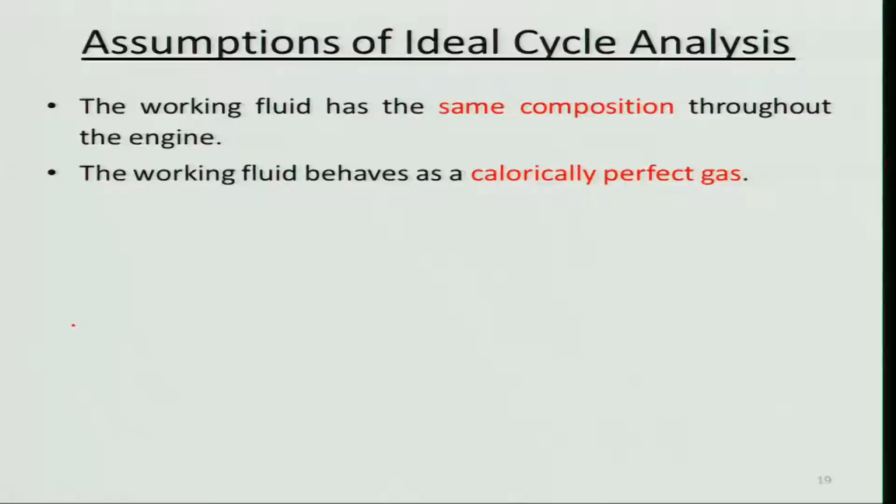And fuel flow rate is negligibly small in comparison to air flow rate, because if you look at the ratio of air to fuel flow rate, it's around 30. Of course, it can vary from 20 to 40 or even more, but we are neglecting it whenever we are comparing. In other places, we won't be neglecting it.

For example, if I am talking about TSFC, thrust specific fuel consumption, or thermal efficiency, can I neglect and say m dot F will be 0? I cannot manage to do that. So that way you should understand: comparison, whenever we are comparing, we'll have to neglect.

And isentropic compression in air intake, fan and compressor. So compression process occurs in all these three components. We are saying isentropic, but in real situation it won't be. Isentropic means reversible and adiabatic. How is that possible? It is not possible.

Of course, one can say that the fluid is flowing through the compressor and air intake very fast, so maybe heat loss to the ambient will be very low. You can neglect it, but it cannot be reversible. Friction will be there; without that, you cannot really do much, particularly in compression. So therefore you cannot have that, but we are doing it for simplicity.

And isentropic expansion in turbine and nozzle. And we are assuming constant pressure combustion, because this is deflagration, and unlike a combustion chamber or closed volume where combustion is taking place, here the pressure remains constant.

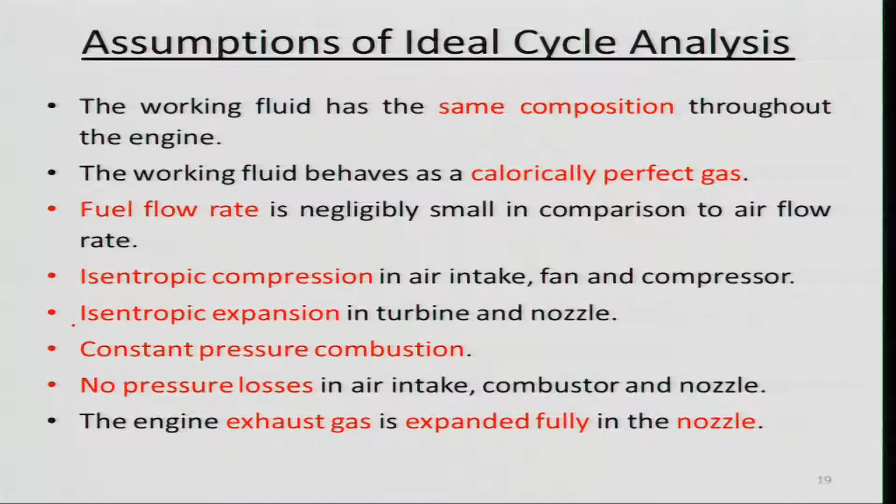But engine exhaust is expanded fully in the nozzle, that means the thrust is contributed due to the momentum, and this is of course an ideal situation, because particularly in a rocket engine and other things which we are not considering, but there you cannot have that.

Here, in some regimes it will be expanded fully, in other regimes it won't. With this assumption, we will now move into the ramjet engine. Keep in mind these assumptions will be valid for the ramjet, and then the turbofan, turbojet, and turboprop engines, which we will discuss under ideal cycle. What we are doing is basically parametric cycle analysis, meaning we will vary those parameters and see how it affects the various performance parameters. That is the objective of this cycle analysis, unlike other analyses you have done—it can be used as a design tool.

So let us look at the ramjet engine. I have shown a schematic diagram. This portion is the air intake. In this case, the air will be entering at supersonic speed, because the ramjet engine operates under supersonic speed conditions, and it will be entering and then decelerated. That means compression of air will take place, and then it will be burned in the combustor. Of course, a flame holder will be there, and once this high temperature, high pressure gas is produced, it will be expanded in a nozzle, which is a convergent-divergent nozzle.

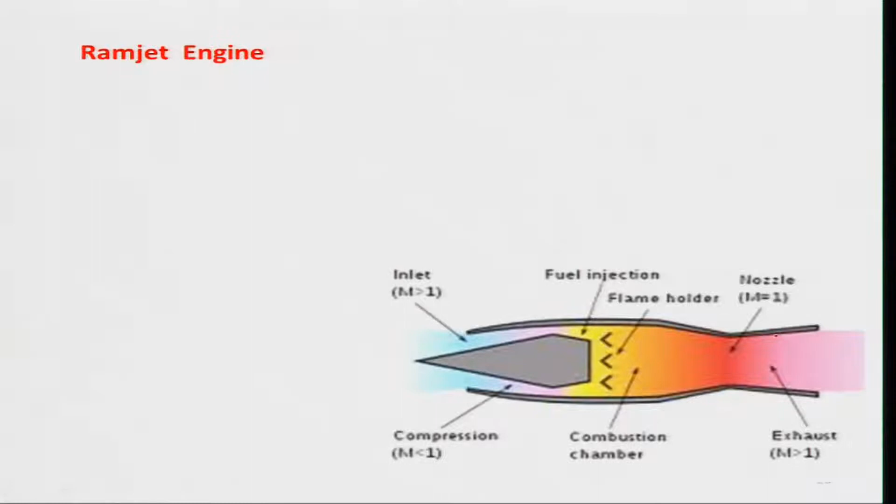Let us look at an actual cutaway view of a ramjet engine. Why is it called ramjet? Because in this case the ram pressure is being utilized. For example, when the air is coming at supersonic speed, there will be a supersonic spike which acts as a diffuser—this is known as supersonic compression. The air will be decelerated from supersonic speed to sonic in the supersonic intake, and then from sonic to subsonic.

Besides this, you need fuel, because fuel has to be burned. For that you need a pump, and an inlet will be there—injectors or atomizers, and a fuel manifold. Fuel is generally stored, like in a Boeing aircraft, in the wing. So in the fuel injection system, atomizers will be there, and it will be mixed with the incoming air, and the mixing should be good.

When you burn it, the flame has to be stabilized with the help of flame holders—a very simple stabilization mechanism is used. When this hot gas is produced at high pressure, it is expanded in the nozzle. If you look at this, it's convergent-divergent, though very small in this case. But what about this other part? There the mixing and combustion take place, and it should be uniform so combustion is complete, because it's at a slightly higher speed. Keep in mind that subsonic combustion occurs here, not supersonic combustion.

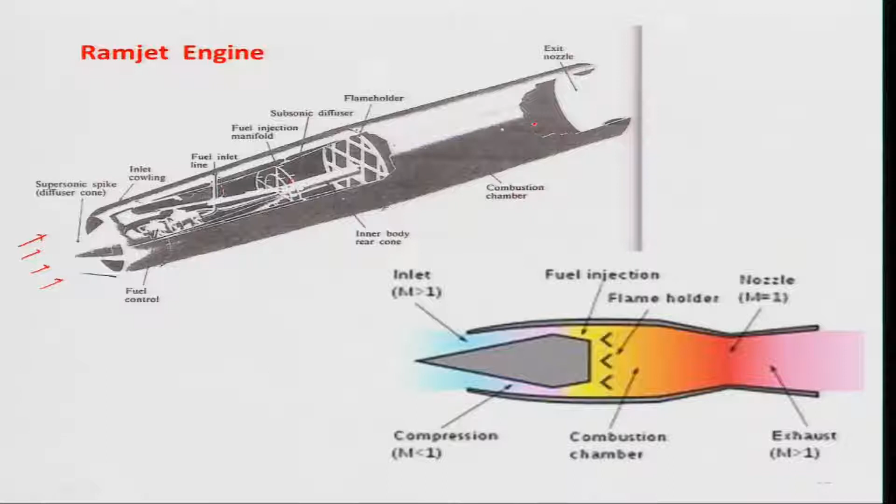So now if you look at it, it's quite a simpler system compared to the gas turbine engine. Why? Because it doesn't have compressor. If compressor is not there, that means there's no turbine. So there's no shaft as such, and the complexity is very, very simple.

Let us look at a schematic of a ramjet which we will be using. Keep in mind that 0 is the station number, and 0 to 1 is supersonic compression—the air has to decelerate from supersonic speed to sonic condition. Then 1 to 2 is subsonic compression. Generally, people design to achieve a Mach number of 0.3 at station 2, at the exit of the air intake. The total 0 to 2 is your air intake, combining both supersonic and subsonic compression. There is no compressor between station 2 and 3, although we keep the same station numbering.

Station 2 and 3 are almost the same, we can say, although it's not shown in this figure. Then 3 to 4 is combustion, where fuel is sprayed, mixed, and stabilized with the help of flame holders—basically gutters used as flame stabilizers—and then expanded in the nozzle, that is 4 to 9. So why don't we need compression here? Because the air enters at very high speed, for example around Mach 2.5 or greater. We compress it by decelerating the flow at the end of the air intake down to Mach 0.3.

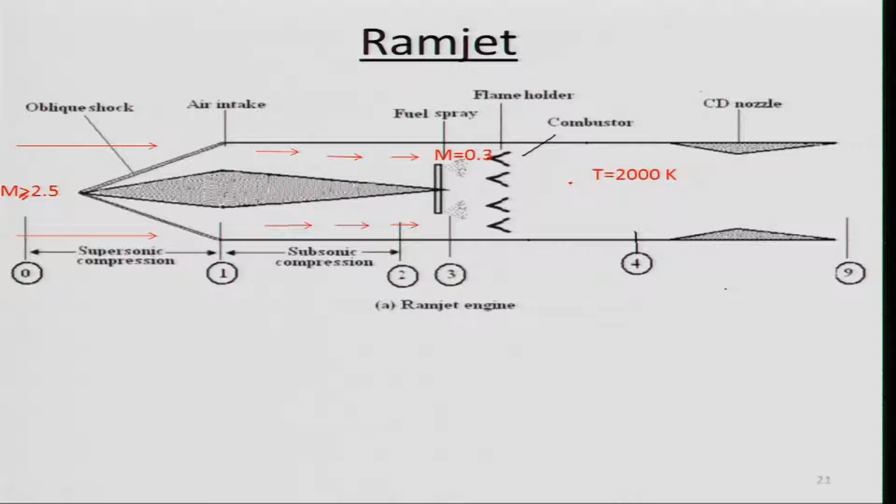There is another important aspect, that you can add more amount of fuel such that it can go to the temperature of 2000 Kelvin, because there is no rotary elements in it. So there is no material problem, although material problem about the combustor liner will be there, but that is being stationary, so you can manage to cool it, design properly, because with the nowadays good exotic materials have come up, you can go a little more beyond the 2000 Kelvin.

Earlier days people were restricting to 1400, 1500 Kelvin kind of thing, even in the ramjet. But when the designer used their mind and came up with ideas how to develop, how to operate the ramjet engine with even existing materials, that is the innovativeness of the design. So therefore, we always work with constraint, and whenever we work with constraint, we get a lot of ideas. So whenever you face a problem, you will have to see that I will have to do something, so that I will use my mind, so that I will get the problem to be solved.

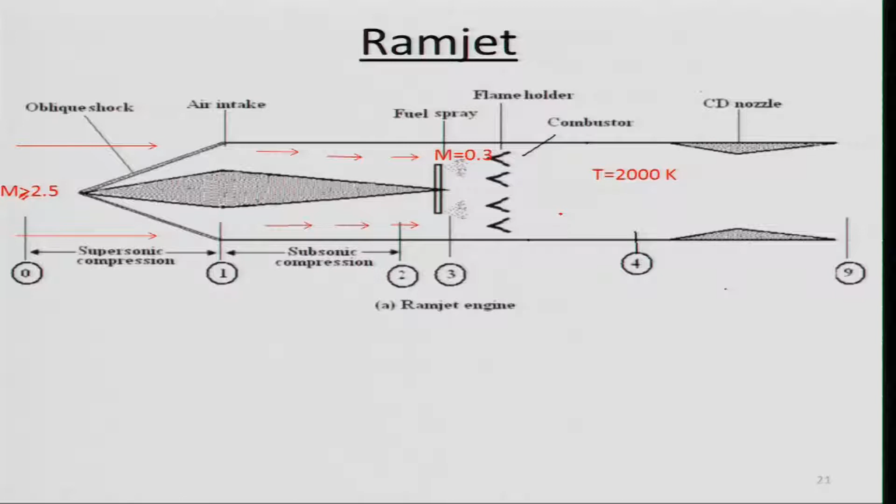That is very important, and it is the simplest of air breathing engines, because it is devoid of gas turbines and rotating elements like turbines and compressors. Of course, as I told, the pressure ratio is limited by the flight Mach number and performance of air intake, that we will see as you go along. It cannot develop the static thrust itself.

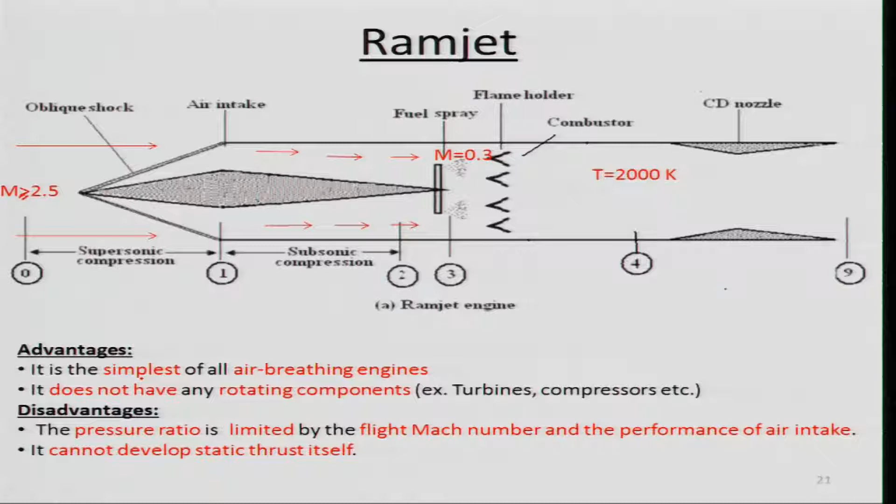But the question is, if it cannot develop static thrust, I cannot really use this unless otherwise I am having another aid to do that. For example, I can carry a missile based on the ramjet principle with a rocket, or in an aircraft, supersonic aircraft, fighter aircraft, then I launch. But if I want to use a ramjet from the ground itself, what do I have to do? What are the ideas? Can anybody tell me?

Pulse jet. Pulse jet itself I can use. Why should I use ramjet? Rocket. Rocket is already being used. So also aircraft. But I want to do something. So what do I have to do?

So what I am thinking, I will leave this question to you, and think about it. If you come up with some ideas without looking at existing ones, then it will be interesting to discuss. Otherwise, some ideas I can give, but I don't want to give at this moment. Later on, we'll see.

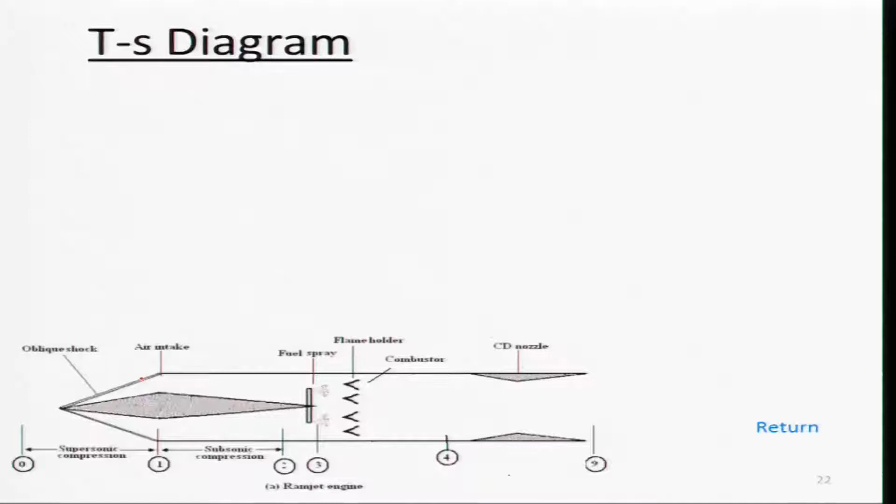Let us look at what are the processes that are involved. As you told, 0 to 2 is basically the compression. In a TS diagram, I can write down 0 to 2, that is the compression, isentropic process, isentropic compression. But if I look at in a PV diagram, how it will be? Compression process 0 to 2, T2, it will be T2, and then TT2 from this station to station 4, it is the combustion, that is constant pressure combustion.

So if I look at in a PV diagram, it will be very simple, that is a constant pressure. Pressure is remaining constant. And PT4 to P9, it will be expansion. Expansion where? Expansion in a nozzle. That is isentropic expansion. So it will be TT4, and this station is basically 9.

And I am just saying it is basically station 4, because we are talking about totally. Keep in mind, whenever I am talking about ratio in combustion chamber, I will be saying pi B will be PT4 by PT2, total I am considering. If I say it is tau B, it will be similar, TT4 by TT2. But whereas when I am coming over here, it is the static condition at the exit of the nozzle.

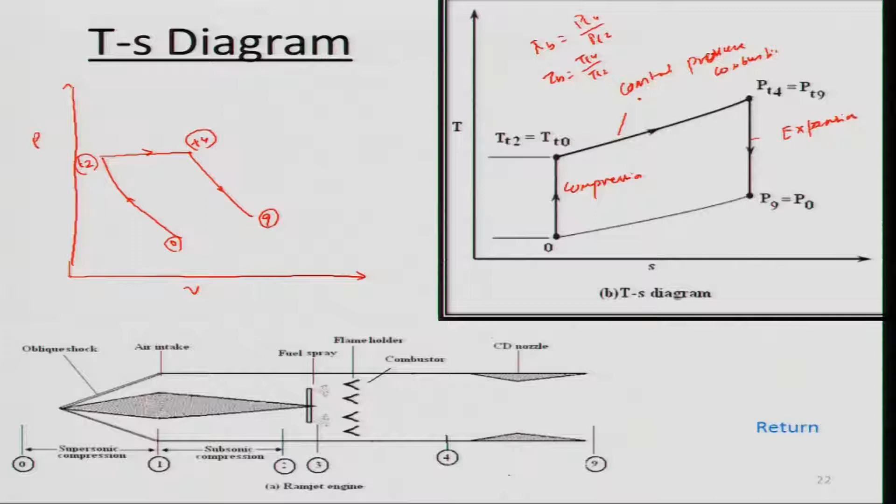Any doubt in this? Because it's a very important thing, and we will be using similar processes describing the process diagram like T-S, P-V, H-S, or some other thing. I can have T-V as well. So you should think about how I can describe the processes in various ways, because that will help you enrich your mind.

So the thrust equation for ramjet engine is basically: thrust equals m dot 9 V9 minus m dot naught V0 plus A9 (P9 minus P0). Keep in mind that in the ideal cycle, we assume a fully expanded nozzle, so therefore P9 is equal to P0. So therefore thrust equals m0 V9 minus m0 V0 only, contributed from the momentum.

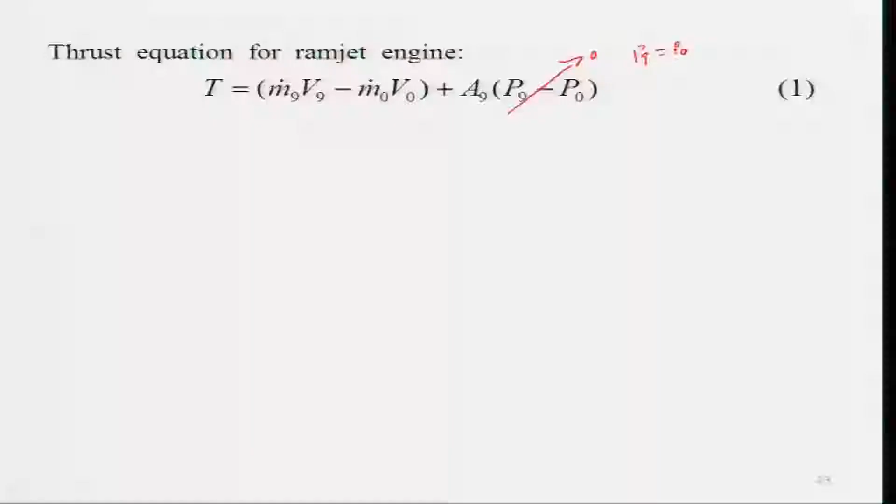What are we trying to do? We are trying to express these equations in terms of various ratios so that we can vary and see what we are doing. Keep in mind this involves a lot of algebra. As I told, it is P9 equals P0, and then m dot 9 is equal to m dot naught, that we are assuming.

That means whatever mass is exiting is equal to the mass entering. That means we are neglecting the mass of fuel being added, which is not exactly right, but we do it for simplicity. What I mean is, m dot 9 is equal to m dot naught plus m dot f. This we are saying is small compared to m0, that's why it is neglected. So it is approximately equal to m0, not exactly true.

So what I'll do is write down this expression. I'll take this m0, V9 and a0, and I am getting V9 by a0. I'll basically find out this a0. This is nothing but m0. And if you look at a0, it is the speed of sound, isn't it? This is the speed of sound.

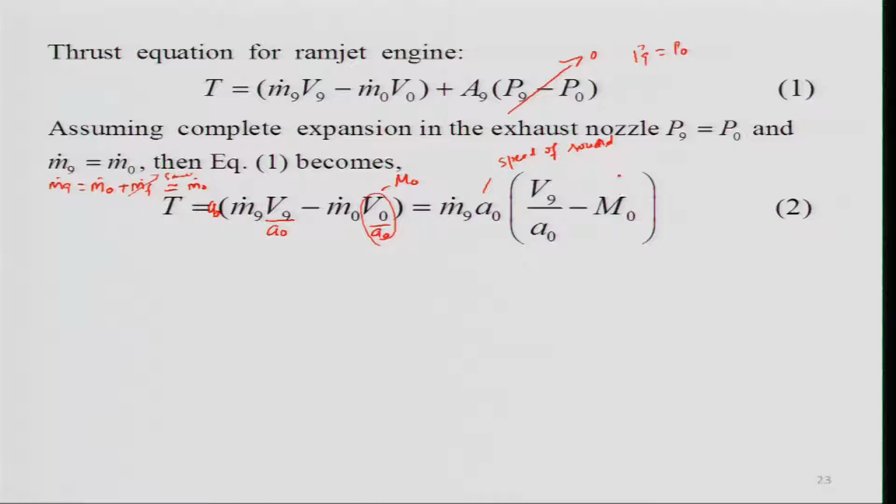Sound where? Ambient, or the free stream. Free stream speed. And m0 is the free stream Mach number.

And this a0 is nothing but root over gamma r t0. In some places you can see this is gamma naught, corresponding to what you will be using not in the ideal cycle but in the real cycle.

So I can write down V9 by a0 whole square is equal to, by definition, a9 square M9 square divided by a0 square, and this a9 square is nothing but gamma 9 R9 T9. We assume gamma 9 equals gamma naught, and R9 is same as R0. So what we get is T9 by T0 times M9 square. So I am getting V9 by a0 whole square equals T9 by T0 times M9 square.

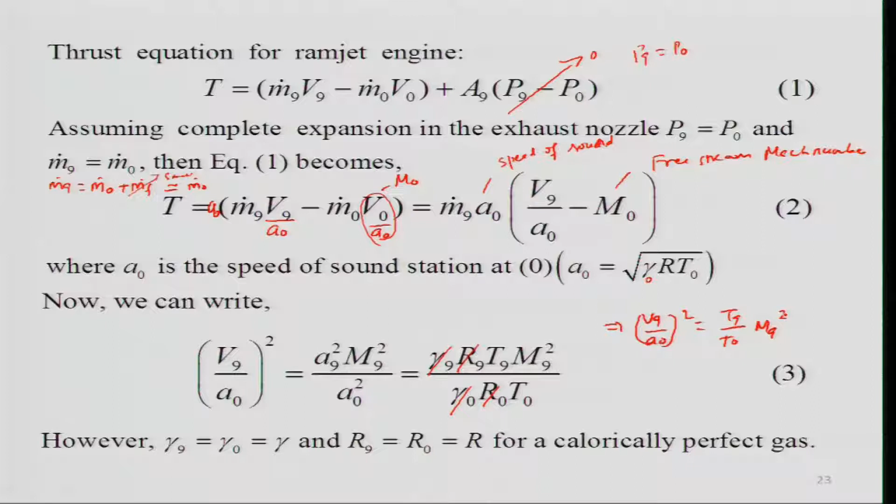I will be writing the same thing in the next slide. Is that clear? So, equation 3 becomes V9 by a0 whole square equals T9 by T0 times M9 square.

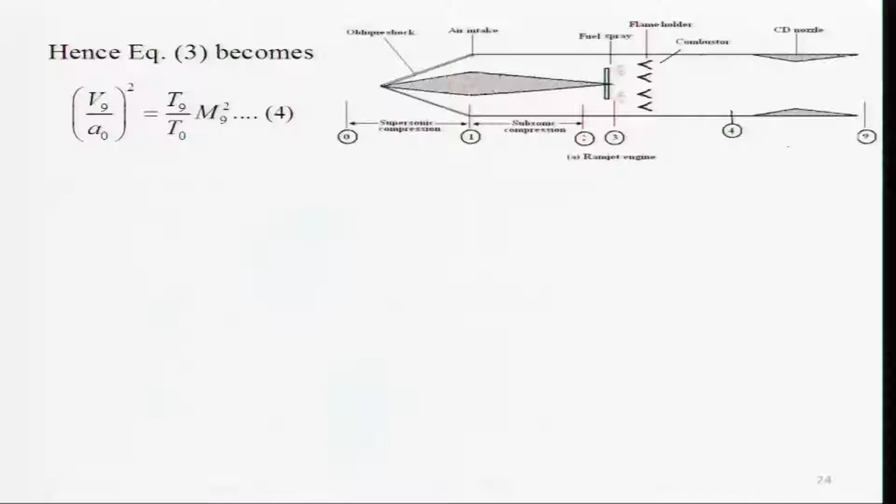So if you look at M9 square, I can express it for an isentropic process, because the expansion is taking place in the nozzle. Can I not write down what M9 will be in terms of pressure ratio, just using the isentropic relationship? So I can write M9 square is nothing but 2 divided by (gamma minus 1), times (Pt9 by P9) to the power of (gamma minus 1) divided by gamma minus 1. This is from the isentropic relationship for Pt9 by P9. I've just rewritten it.

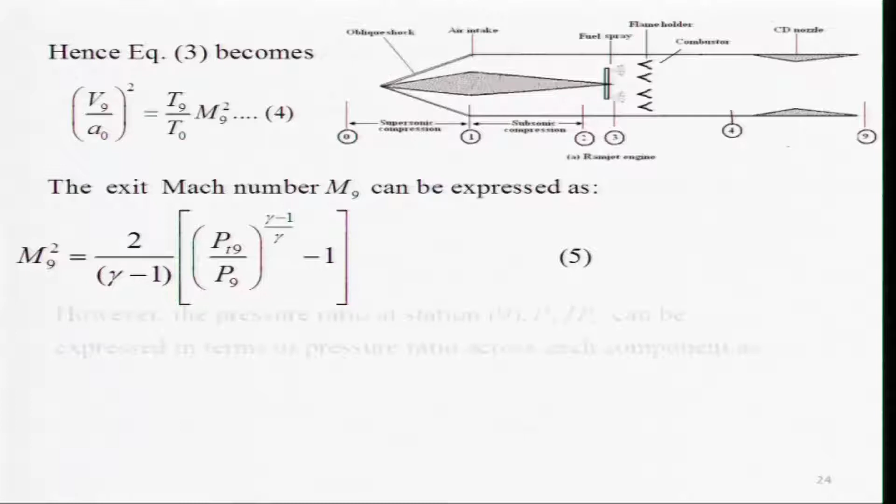So what we will do now is look at Pt9 by P9, and how we can express it in terms of various pressure ratios across each component. So I can write Pt9 by P9 equals Pt9 by Pt4, times Pt4 by Pt2, times Pt2 by Pt0, times Pt0 by P0, times P0 by P9. And this last ratio is equal to 1, because P9 is equal to P0 — that's what we assumed for fully expanded flow.

So if you look at this, this is nothing but your pi n, the total pressure ratio in the nozzle, and this is nothing but pi b, Pt4 by Pt2 — this is the combustor's pressure ratio.

And this is nothing but your pi d, and this is nothing but your pi r. Keep in mind that this is pt not by p0, that means total, right, to the static. That's why it's saying it is pi r, by definition, because I have defined that thing next to it.

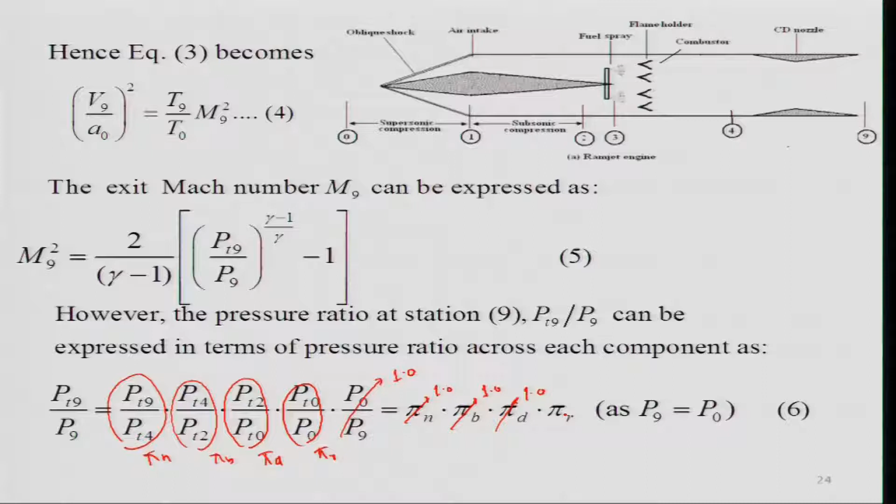Can I say pi r is equal to 1? I cannot, because Mach number, it is not total, it is basically, except all these things, pressure ratio, this was the pressure ratio which is with respect to static. So this is nothing but 1 plus gamma minus 1 divided by 2, Pt by P9, M9 square, right, that one. So why across the burner the pressure?

That is the assumption we have made. You look at your assumptions. We have looked at the total pressure ratio across the combustor will be 0 total pressure loss. If total pressure loss is 0, then PT9 divided by PT2 will be 1, no pressure losses. But however, in real situation it won't be. Ideal situation it is yes.

So what we will do, we are getting pi n, pi b, pi d is equal to 1. So Pt9 by P9 is equal to pi r. And now expression of M9 can be expressed as M9 is equal to 2 divided by gamma minus 1, Pt9 by P9, gamma minus 1 over gamma. So what we will say, this is nothing but your pi r.

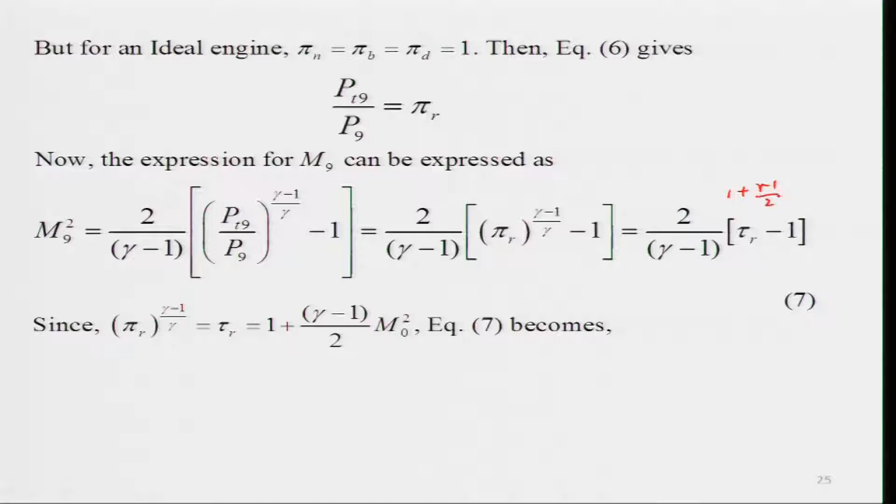If you look at pi r to the power gamma minus 1 over gamma, that is nothing but your tau r. Because I can relate this isentropic temperature ratio to pressure ratio, isentropic pressure ratio, we know those expressions. So therefore, whereas pi r to the gamma, tau r is nothing but 1 plus gamma minus 1 divided by 2, M naught square. If I substitute over here, what I will get? I will get gamma minus 1 times M naught square minus 1.

So this will cancel it out, right? And multiplied by 2 over gamma minus 1, right? So what I will get, I will get this also will be cancelling out. So 2 to cancel it out is equal to M naught square.

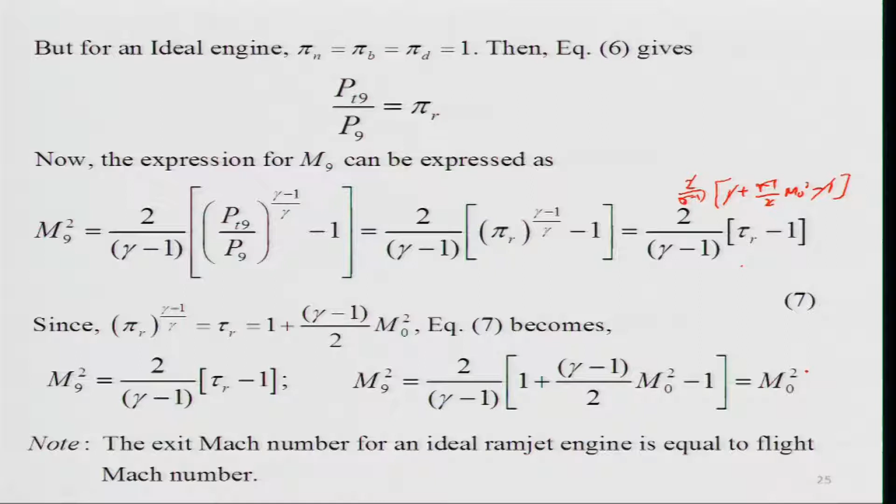What is it saying? It is saying a very interesting statement. It's saying the exit Mach number for an ideal ramjet engine is equal to the flight Mach number. That means what really is happening? That means whatever the velocity of air which will be entering into the ramjet will be same as the exit velocity of the engine? Certainly no. It is the Mach number which is same, under ideal condition. In real situation it won't be. So that is the interesting part, but you should not assume that nozzle exit velocity V9 is equal to V0, the flight velocity.

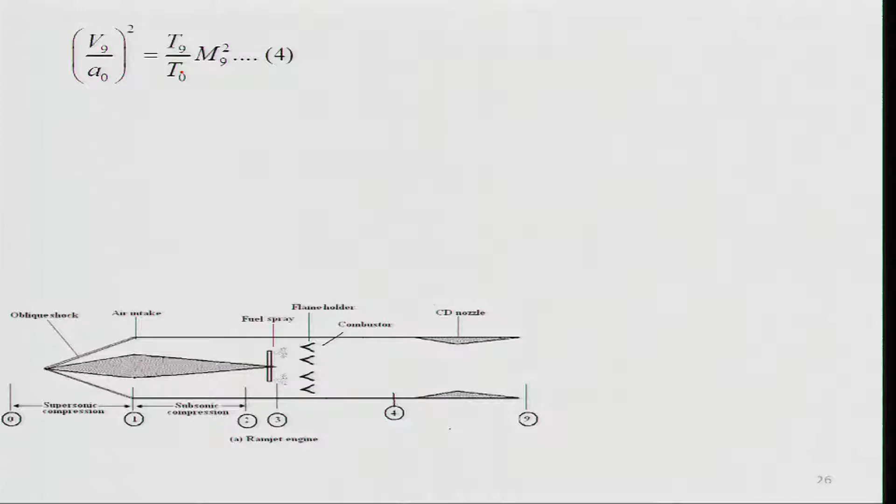Certainly no. Okay, so now we look at how we can look at this T9 by T0. So T9 by T0 temperature ratio I can write down as TT9 divided by T0, divided by TT9 by T9. Can I not write like this? Absolutely no problem, because it's just you rewriting that.

Now we will be looking at how we can say this TT9 by T0, and keep in mind this TT9 by T9 can be related to what? Pressure ratio, temperature ratio, all those things can be related, right? And we will now look at T9 by T0 in terms of temperature ratio. I can write down TT9 by T0 is equal to TT9 divided by TT4, into TT4 by TT2, into TT2 by TT0. So if you look at this temperature ratio, this portion is nothing but your tau n, this is nothing but your tau b, this is nothing but your Tt2 by Tt naught which is tau d, and this is of course the tau r.

But if I look at this, can I say that tau n is equal to 1 total, because we are not adding any heat, nor are you taking any heat out of it. Adiabatic condition, isentropic expansion, right? So therefore I can say this is 1.

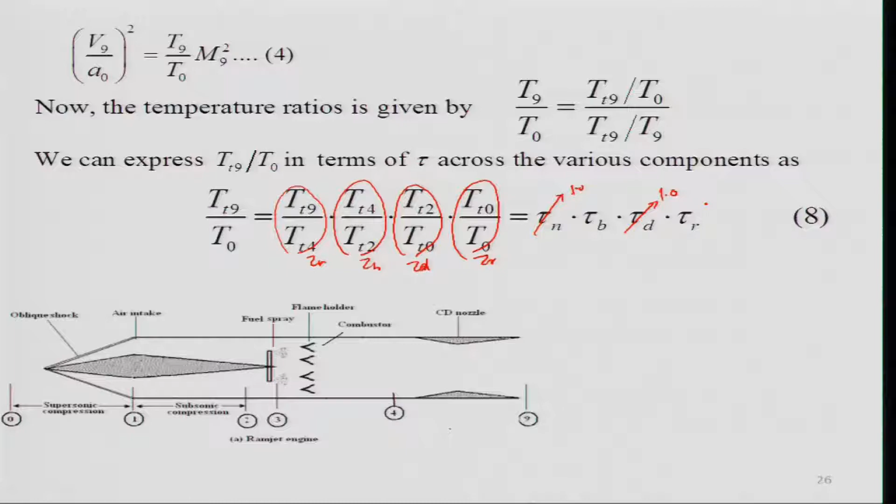What about tau d? I can say it is constant, ratio is 1, right? And tau r, can I say it is equal to 1? Certainly no, right? Because it is dependent on the flight Mach number. It can never be 1, it will always be more than 1, unless the flight Mach number is 0, then it will be 1, right?

So therefore I can say that T9 by T naught is nothing but tau b multiplied by tau r. So T9 by T naught is nothing but Tt9 divided by T naught, right? And Tt9 by T9, if you look at that, is equal to tau r, we have already seen that earlier. So it will cancel out, and you will get tau b. That means T9 by T naught is nothing but tau b.

And of course, I have already told you earlier how Tt9 by T9 is nothing but pi r to the power gamma minus 1, which is nothing but tau, right? We have already derived this, so we need not repeat it.

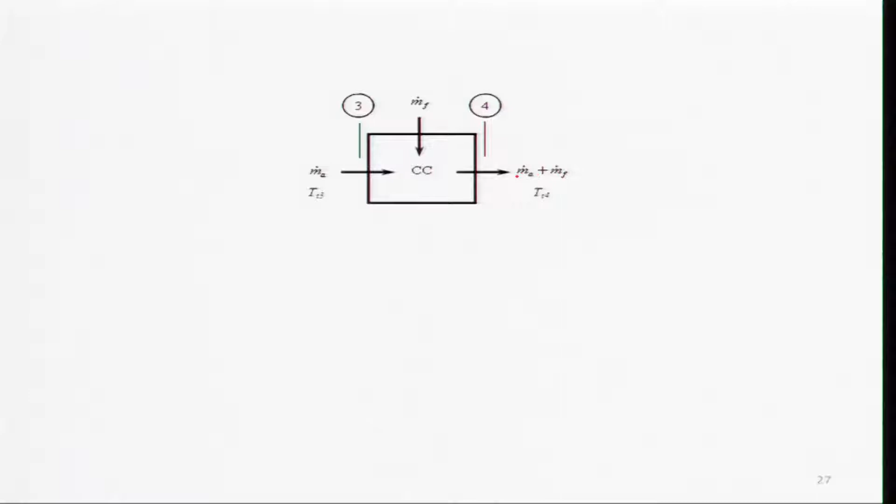Now we will look at the combustor, keeping in mind that we are assuming this combustion chamber flow to be one dimensional, but in a real situation it can never be, okay? We are assuming that certain amount of air is entering and fuel is being added, and it goes out with a certain mass flow rate of air and fuel, considering the flow to be one dimensional and steady, which I think I didn't mention earlier. Even in the real cycle, we assume the flow to be steady, keep that in mind.

So therefore it will be m dot 3 Cp Tt3 plus m dot f delta Hc is equal to m dot 4 Cp T4. What we are assuming here, from the continuity equation, is that m dot 4 is equal to m dot f plus m dot 3, and since m dot f is very very small compared to the rest, we say m dot 4 is equal to m dot 3 is equal to m dot air. And we are assuming a calorifically perfect gas, so Cp3 is equal to Cp4 equal to Cp, right?

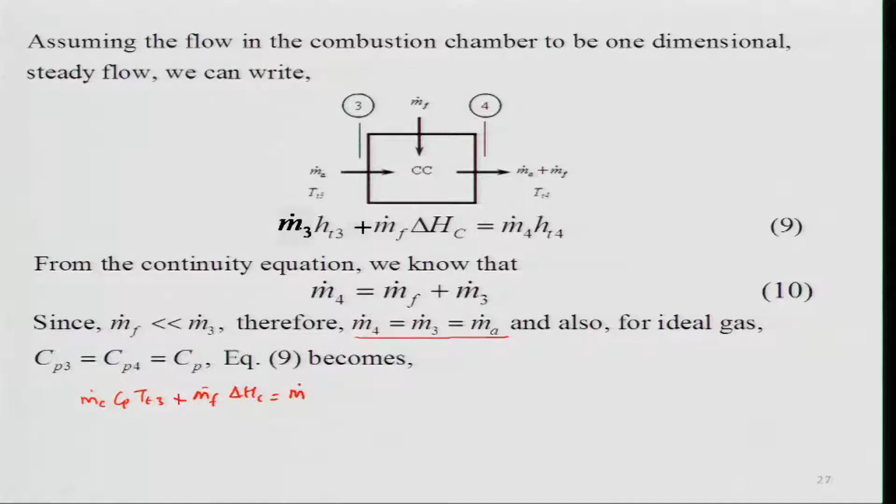So if I write down this expression, equation 9, Cp T3 plus m dot f delta Hc, that is the heat of combustion, equals m dot a Cp Tt4, right? If I simplify this further, I get m dot f delta Hc is nothing but m dot A Cp times Tt4 minus Tt2, because T3 is equal to Tt2, so in this place I can write Tt2.

So I can take this out: m dot A Cp Tt2 times Tt4 divided by Tt2 minus 1. So what I can write down here is m dot f delta Hc is equal to m dot a Cp times Tt4 minus Tt2, and from that, if I take Tt2 out, I get Tt4 by Tt2.

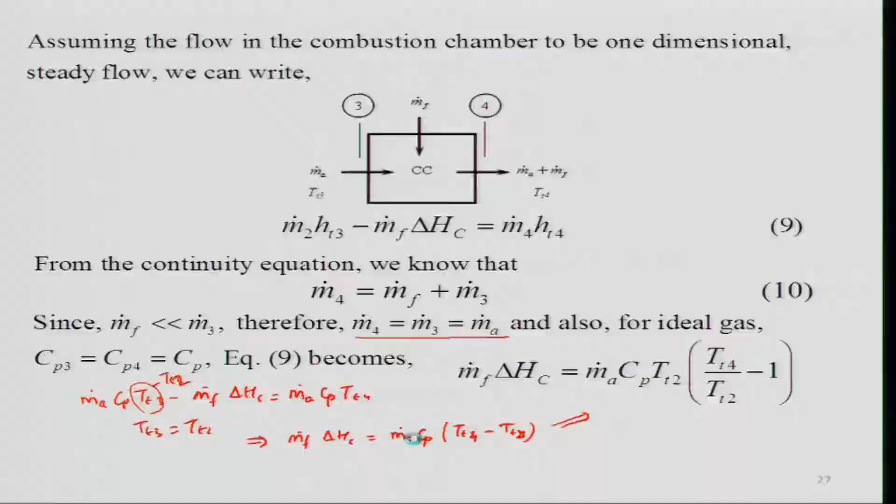So let us define f equal to m dot f by m dot a, and from that expression I get m dot f divided by m dot a is equal to Cp Tt2 divided by delta Hc, times Tt4 divided by Tt2 minus 1, and this is nothing but tau b by definition, right, because we are assuming Tt2 is equal to Tt3 — there is no compressor here, so we use that.

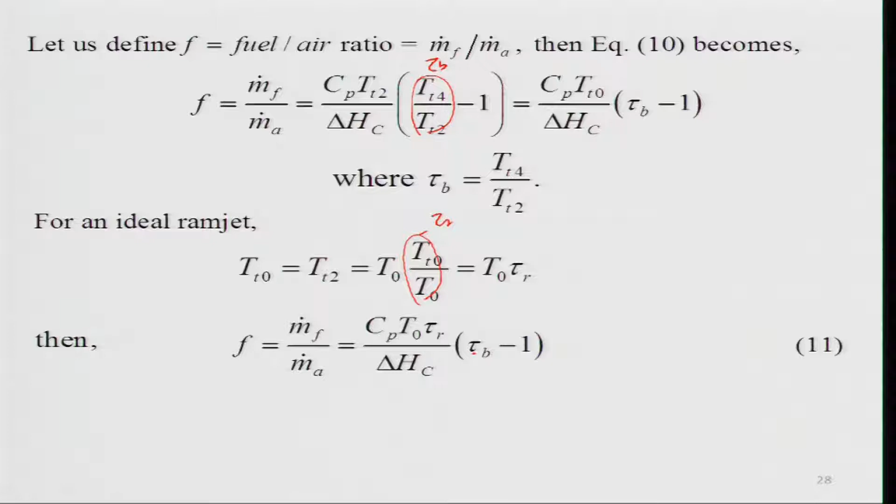So now we shall write down the one definition which we will be using. I didn't define that yet, let me define that: tau lambda. This is the total enthalpy at the burner exit.

The total enthalpy at the burner exit will be Cp4 Tt4 divided by Cp0 T0. So the Cp will cancel out. Therefore Tt4 by Tt2 into Tt2 by T0, equal to tau b into tau r. That means tau lambda is basically tau b tau r, right?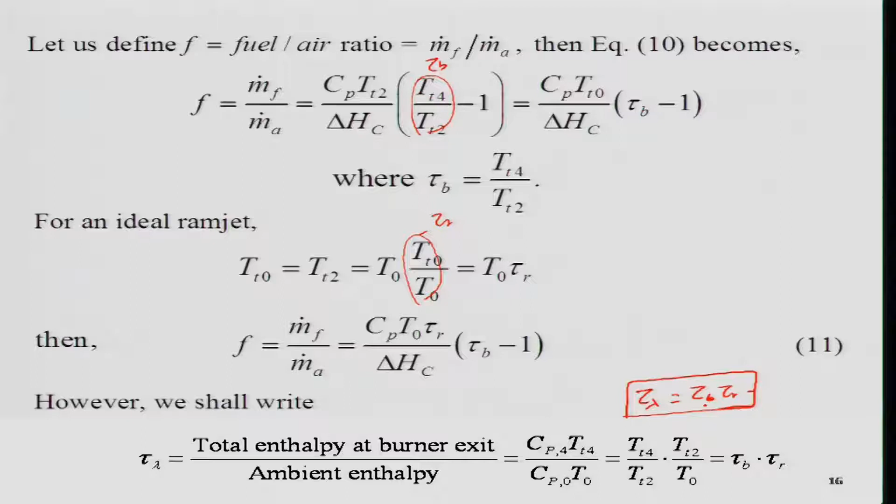And this will be used in some places. So coming to that, I can write down f is equal to m dot f Cp T0 delta Hc tau b tau r. I can write down tau lambda, minus tau r.

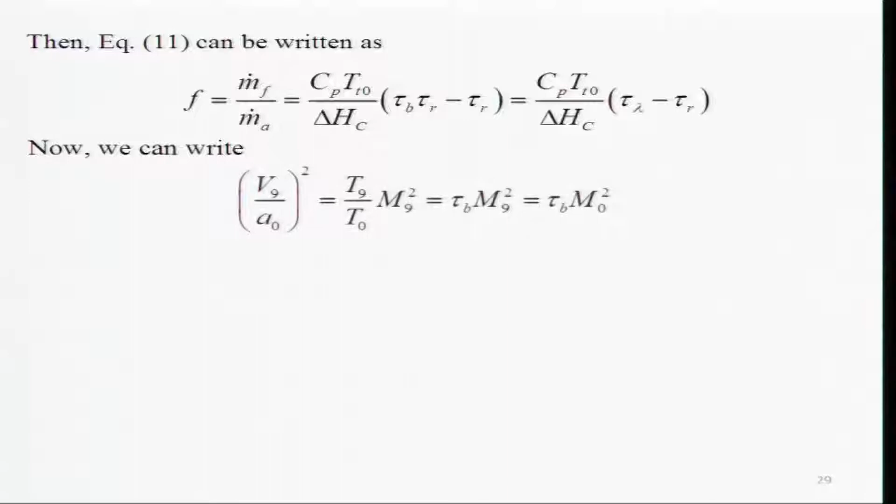So V9 by A naught square, if you look at what we have done, we have found out T9 by T0 M9 square, and this is nothing but your tau b, and M9 is nothing but your M0 square, so that became tau b M0 whole square.

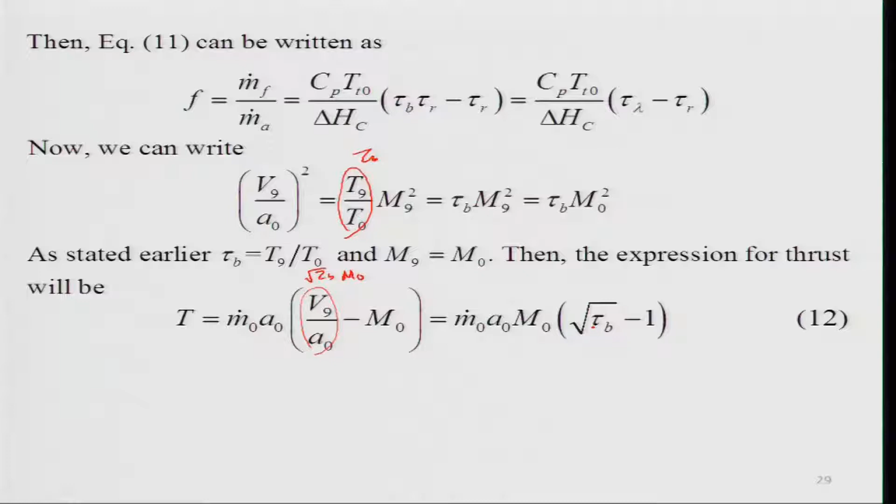It says that thrust will be dependent on the amount of mass flow rate entering into the engine. It will be dependent on the flight Mach number, and it will also be dependent on tau b. That means how much energy you are adding. Tau b represents the temperature ratio across the burner, which will be dictated by how much fuel is being burned, so that total temperature will increase. So this is the simple expression we are getting, and we will be varying these parameters to see how it is dependent on what, and what the conclusions are.

So that's why you call it a parametric segment.

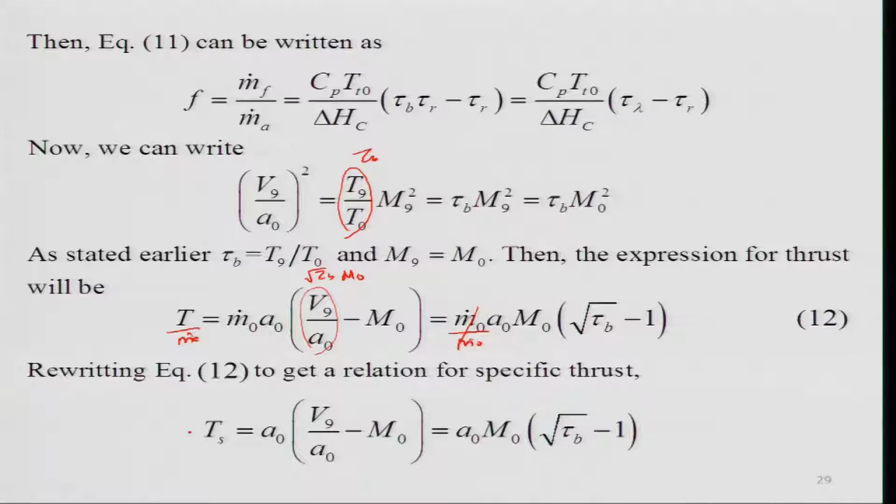Rewriting the equation to get a specific thrust, because if I just divide it by m dot a, m dot a, or m naught, then I will get specific thrust: a naught into V9 by a naught minus m naught. So you can write down a naught m naught root over tau b minus 1. Basically the same thing, only this is the specific thrust, and that is the thrust.

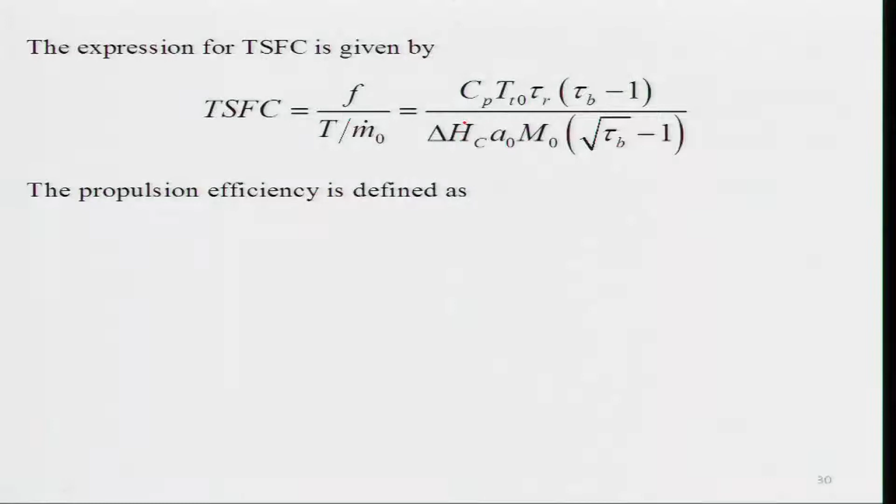So now what we will do, we will look at TSFC, just put in these values f and specific thrust, you will get. There are several terms coming into the picture, and of course it is a function of similar stuff except the delta Hc has come into the picture.

And propulsive efficiency can be expressed in terms of tau b. In place of tau b, you can talk about tau lambda by tau r, because tau b is related to tau lambda, or tau lambda is related to tau b and tau r. We know that tau lambda is equal to tau b tau r.

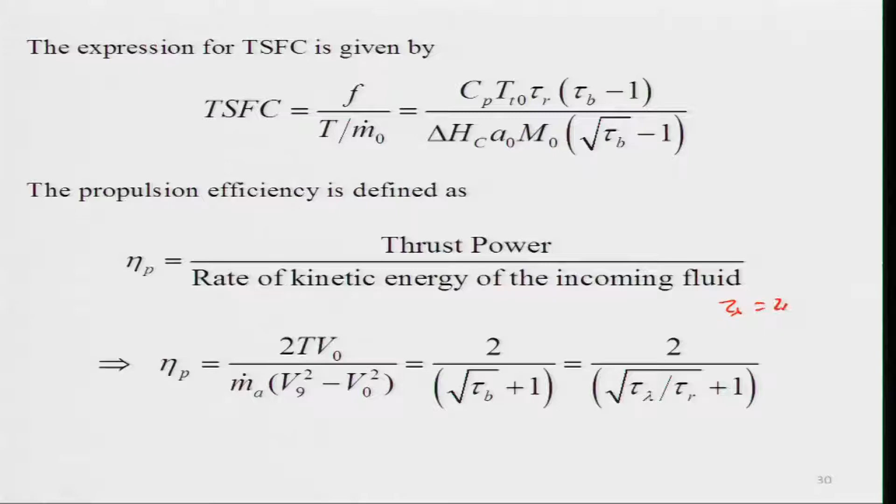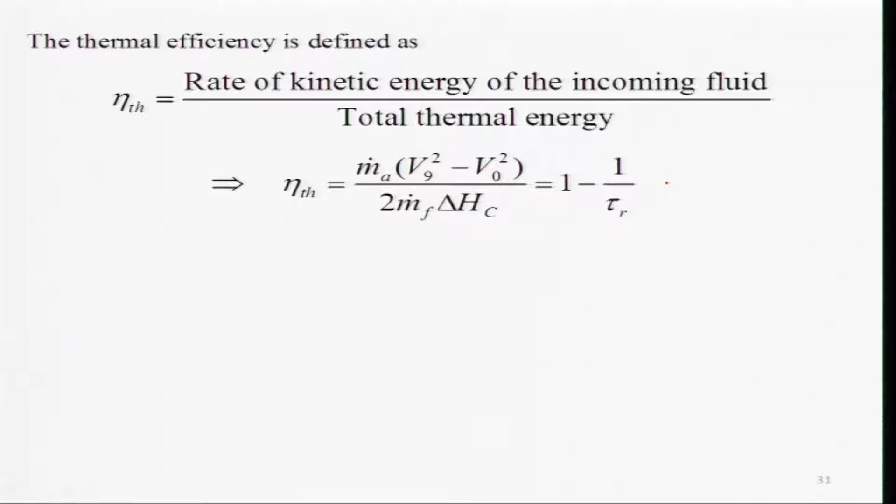And if you look at thermal efficiency, it will be similar. You can note that the thermal efficiency is equal to 1 minus 1 by tau r. That means it is dependent only on the flight Mach number. It is not dependent on tau b and other things, like how much heat is being added. That is a very interesting result, right?

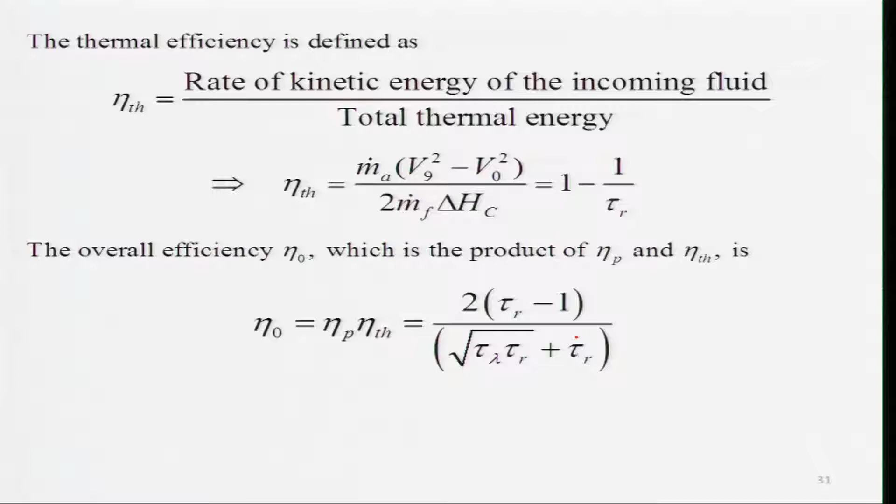So, what I say is we are armed with all these expressions. What we'll have to do is vary these parameters, which will be governed by altitude, governed by flight Mach number, and governed by the temperature at the exit of the components.